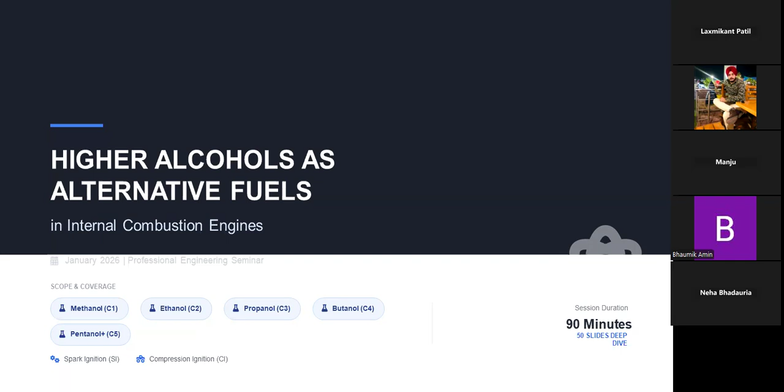There are some agenda and learning objectives, such as motivation, decarbonization, air quality, energy security. Other one is fuel property, fundamentals, and comparisons. SI and CI combustion mechanism and performance. Emission standards, infrastructure, and safety. Last is techno-economics, case studies, and future outlooks.

So why alcohol fuels now? Climate target, renewable fuel, mandates, accelerating globally. There is one graph also showing on screen. You can see that drop-in and flex fuel pathways allow near-term impact without full electrification. Another one is high octane and oxygen content enable significant engine efficiency gains also. Emerging e-fuels, power to alcohol, closes the carbon loop effectively.

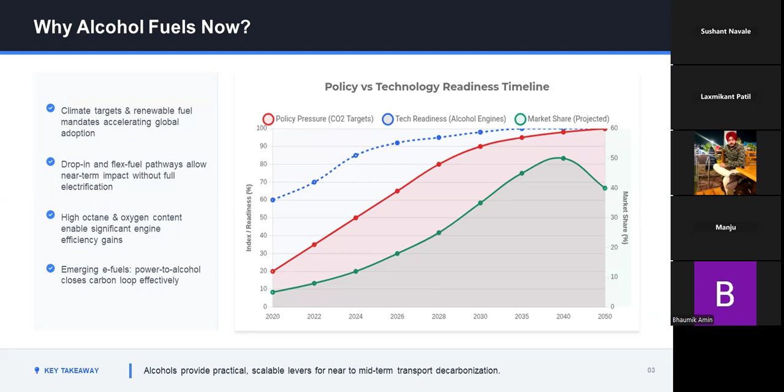There is another graph showing on screen of core fuel properties at a glance.

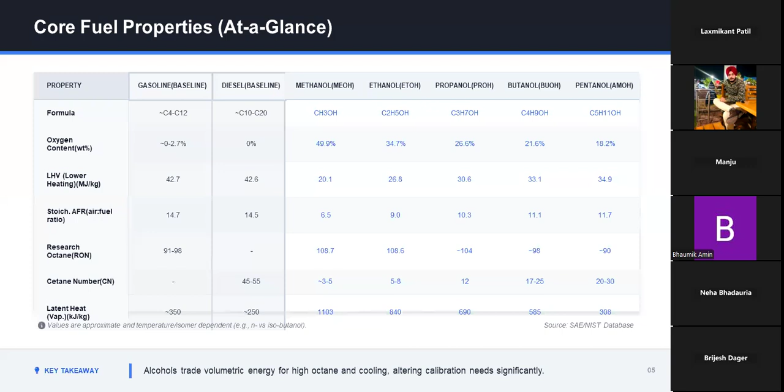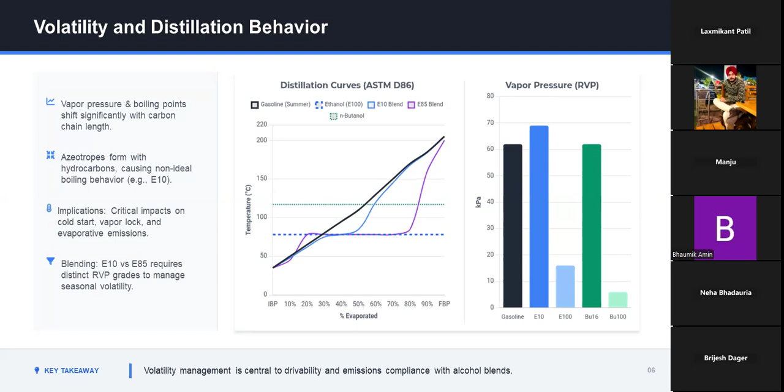What is volatility and distillation behavior? One graph is also showing on screen. You can see that vapor pressure and boiling points shift significantly with carbon chain length. Azeotropes form with hydrocarbons causing non-ideal boiling behavior, for example E10. Implications - critical impact on cold start, vapor lock, and evaporative emissions. Last is blending - E10 versus E85 requires distinct RVP grades to manage seasonal volatility.

Miscibility, hygroscopicity, and water tolerance. One picture is shown on your screen. One is lower alcohols, C1 to C2 - highly polar nature, strong affinity for water, resist mixing with non-polar hydrocarbons. Second is high hygroscopicity, rapidly absorbs moisture from ambient air during storage. Last is phase separation risk - separates into aqueous organic layers if water threshold exceeded.

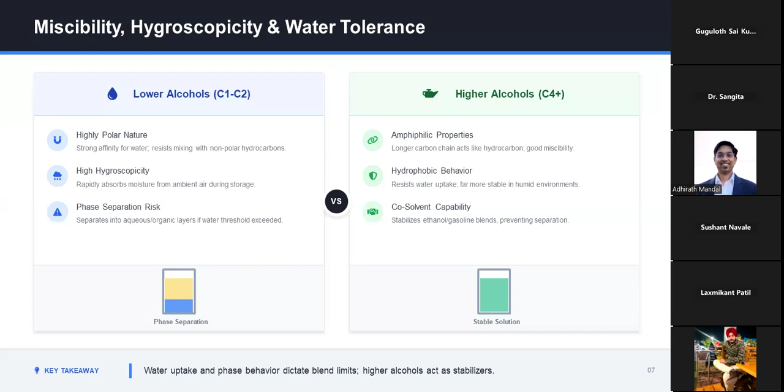Another picture is of higher alcohols, which is C4 and above. Amphiphilic properties - longer carbon chain acts like hydrocarbon, good miscibility. Hydrophobic behavior - resist water uptake, more stable in humid environments. Last is co-solvent capability - stabilizes ethanol-gasoline blends, preventing separation also.

Material compatibility and corrosion - there are 4 points of that. First one is elastomers and plastics - swelling and embrittlement risks. Metal - aluminium, zinc, and copper corrosion with low pH. Conductivity with galvanic effect in presence of water. Last is mitigation - compatible materials, inhibitors, and coatings.

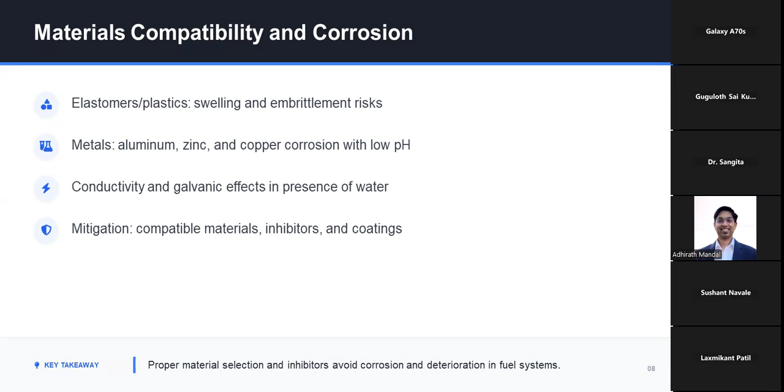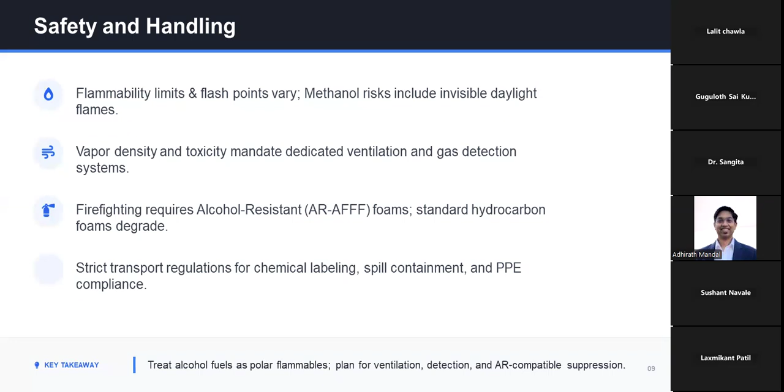What is safety and handling? There are also 4 points of that. First is flammability limits and flash point vary - methanol risks include invisible daylight flames. Second is vapor density and toxicity, mandate dedicated ventilation and gas detection system. Third one is firefighting requires alcohol resistant foam, formula AR-AFFF. Standard hydrocarbon foam degrades. Last is strict transport regulation for chemical labeling, spill containment, and PPE compliance.

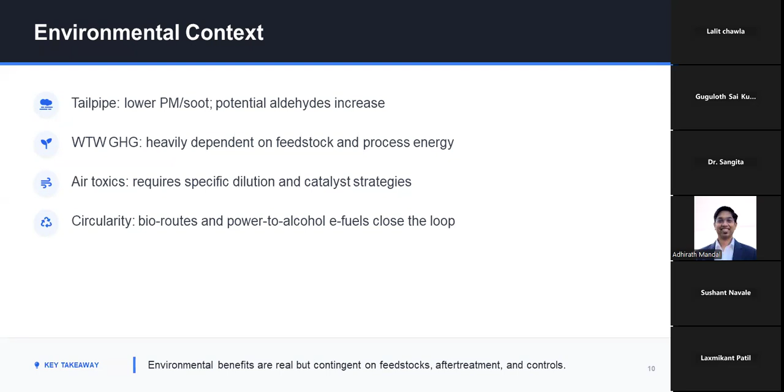Here is one diagram shown on your screen. You can see that this is of SI combustion fundamentals with alcohols. Let's discuss the diagram. High octane, RON greater than 100, suppresses knock, enabling higher compression ratios and optimal spark timing, formalized as MBT. Second is charge cooling via high latent heat, increases air density (formula VE) and drastically reduces end gas temperatures. Last is tolerance for lean operation, which improves thermal efficiency due to wider flammability limits.

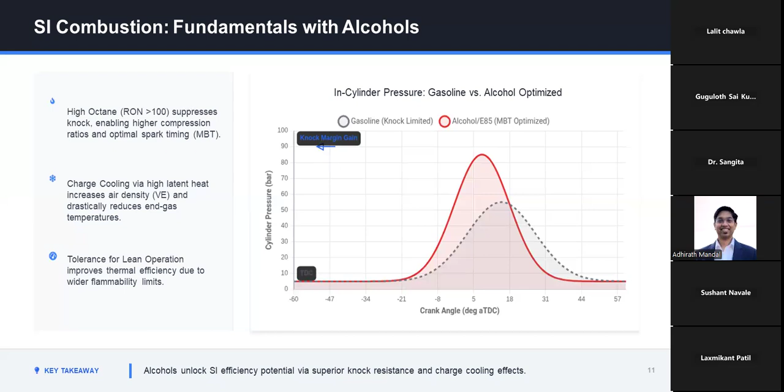Here is another diagram on your screens, of laminar flame speed versus equivalence ratio. Higher laminar flame speeds for methanol and ethanol exhibit significantly faster flame propagation than gasoline, especially in rich mixtures.

Second is shortened burn duration. Faster turbulent combustion allows MBT spark timing closer to TDC, improving thermal efficiency. Last is operational implications: benefits include higher indicated efficiency, but this creates a risk for cold start misfires due to vaporization issues.

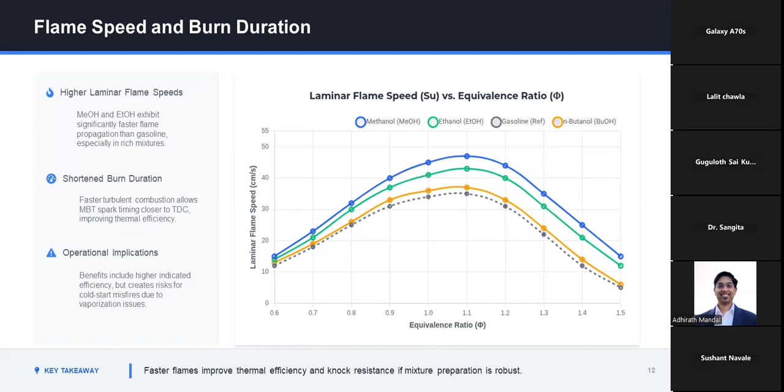What is SI emissions formation with alcohols? There are four points to that.

First is CO and HC, trends are highly sensitive to lambda and wall wetting effects due to high latent heat. Second is unregulated aldehydes, which have two more parts: formaldehyde and acetaldehyde, which may increase, requiring specific oxidation catalysts.

Third, NOx is generally low due to charge cooling reducing peak temperatures, though this is calibration dependent. Last is catalyst light-off challenges that arise from cooler exhaust.

Oxygen storage capacity, short form OSC, interacts with fuel oxygen.

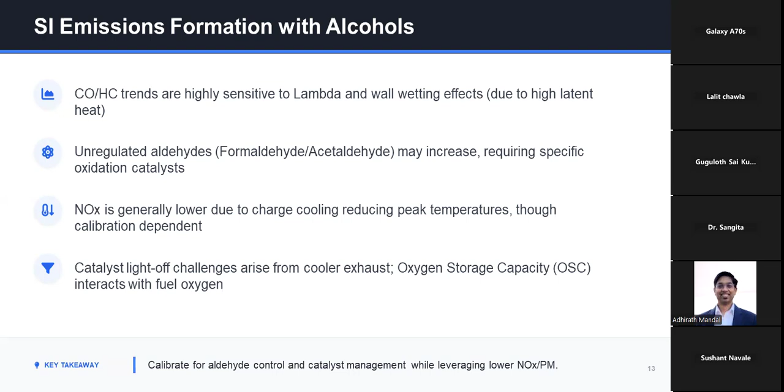One diagram of ambient temperature is shown on your screen. High latent heat significantly hinders cold vaporization; methanol's latent heat is bigger than ethanol's. Second point is mitigation.

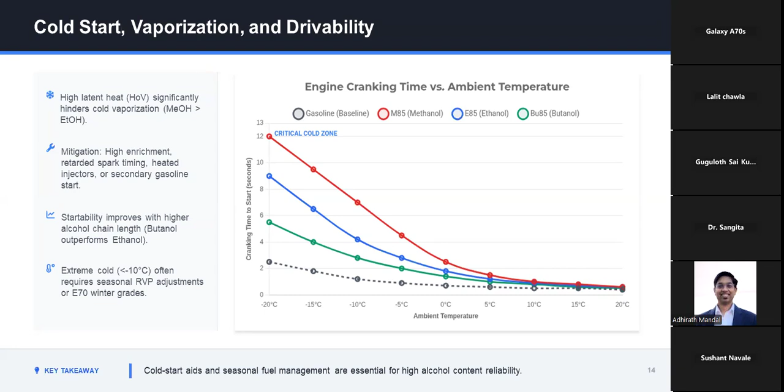Mitigation strategies include high enrichment, retarded spark timing, heated injectors, or secondary gasoline start. Startability improves with higher alcohol chain length, butanol outperforms ethanol. In extreme cold, below minus 10 degrees, this often requires seasonal RVP adjustments or E70 winter grades.

CI combustion's fundamentals and challenges. There is a diagram which represents low cetane number alcohols, 3 to 5, versus diesel at 45 to 55, which causes resistance to auto-ignition and cold start issues.

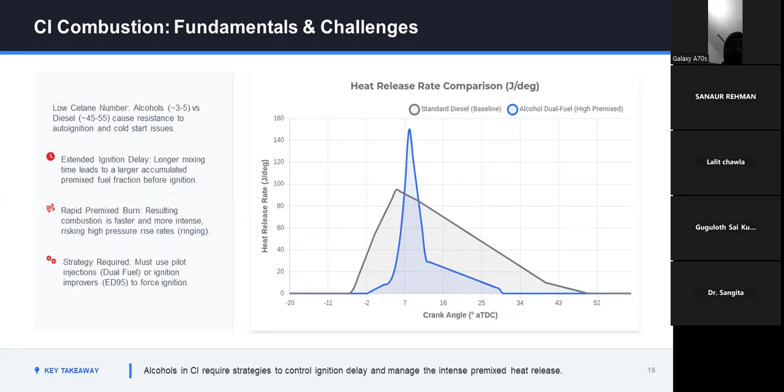Extended ignition delay and longer mixing time leads to a larger accumulated pre-mixed fuel fraction before ignition. Rapid pre-mixed burn results in combustion that is faster and more intense, risking high pressure rise rates, known as ringing. Last is strategy required: must use pilot injection, dual fuel, or ignition improver like ED95 to force ignition. You can also see a diagram of crank angle.

There is a diagram of the soot suppression mechanism, you can see that.

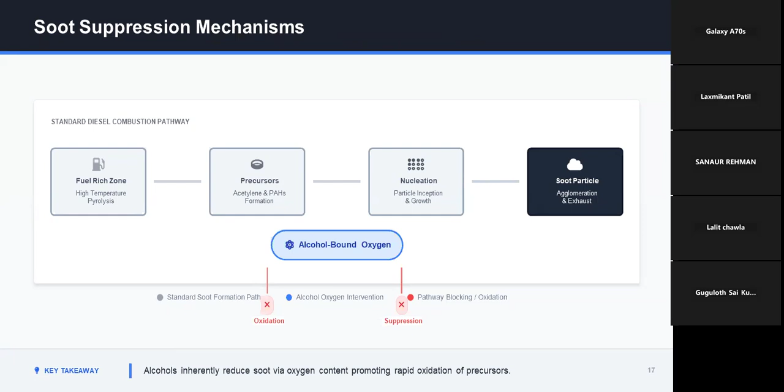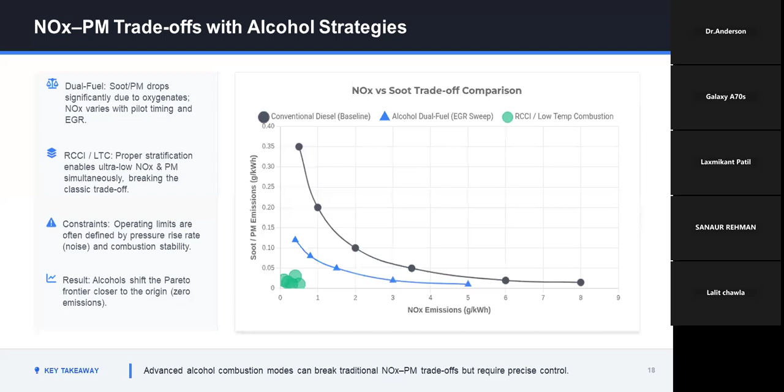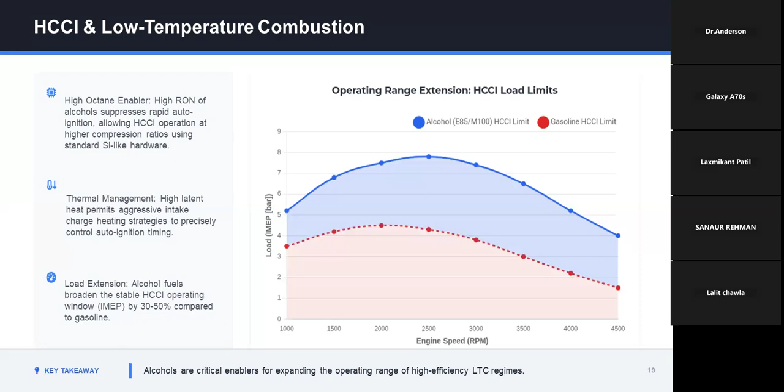Let's talk about measuring alcohol combustion. In-cylinder pressure, HRR, knock, and PRR metrics.

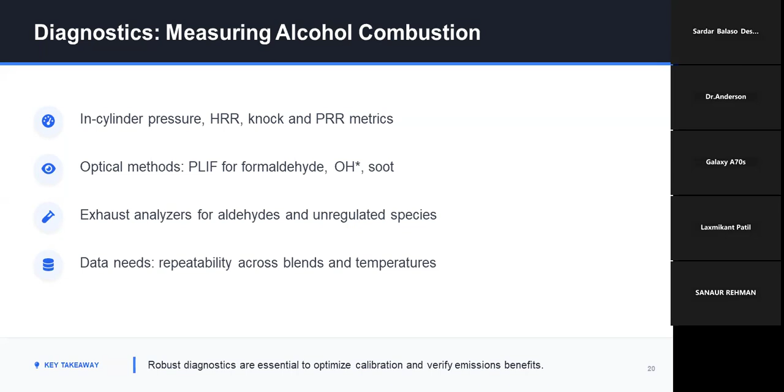Second is optical methods, which are PLIF for formaldehyde, OH soot, and exhaust analyzers for aldehydes and unregulated species. Last is data needs: repeatability across blends and temperatures.

What is SI hardware and calibration adaptation? There are four points to that. First one is flex fuel sensors and closed loop lambda control.

Second is larger injectors, pump for lower LHV fuels. Third one is compression ratio and boosting opportunities. Let's talk about the last point.

Knock control: ion sense and pressure based strategies.

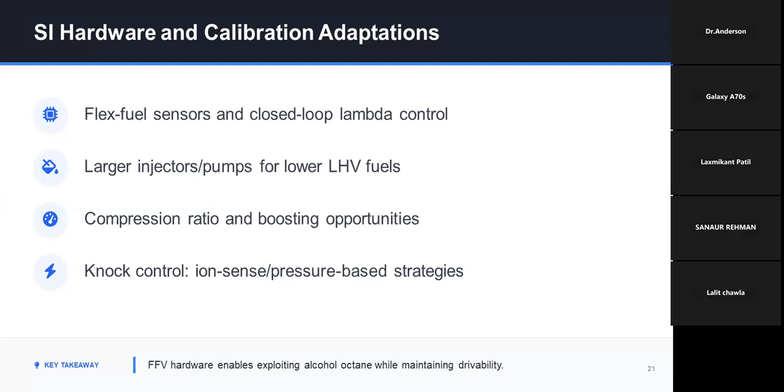Let's talk about CI hardware and system consideration. It also has four points.

First one is injector material and seals must be compatible with polar alcohols. For example, FKM and stainless steel.

Second one is pilot and multiple injection capabilities required for precise ignition and heat release control. Third point is intake port injection.

It enables cost-effective dual fuel retrofits for existing engines. Last one is turbocharging and EGR tuning, necessary to manage altered exhaust enthalpy and thermal profiles.

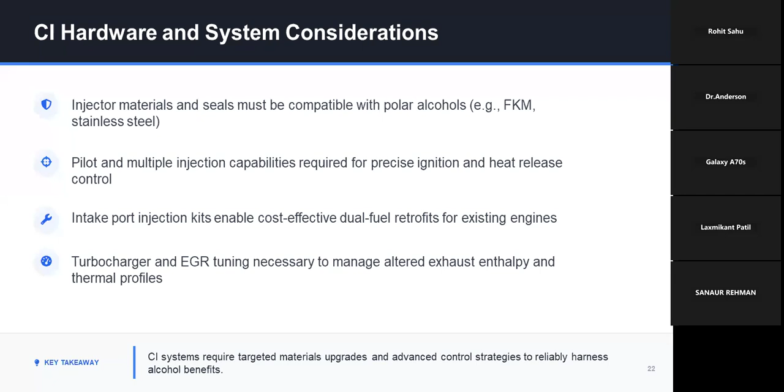Lubricity, wear, and oil management. Let's talk about that, it also has four points.

First one is alcohols reduce fuel lubricity, increasing wear risk of high pressure pumps and injectors. Oil dilution occurs from low volatility fuel fraction and cold start potential, thinning the lubricant.

Third point is combustion byproducts can accelerate total base number, short form TBN, depletion and corrosion. Last is mitigation, which prescribes use of lubricity additives, adjusted oil change intervals, and optimized warm-up strategy.

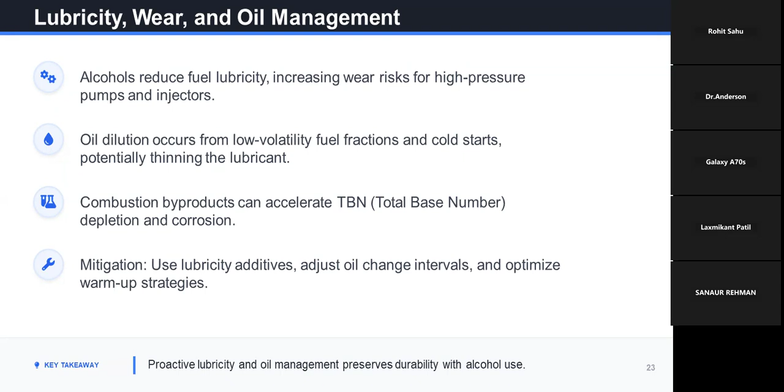After treatment interaction has a total of 5 points. Let's talk about the first one: TWC challenges - oxygenate rich exhaust and altered light-off behavior.

Second is CI oxidation, which we also call DOC, critical for aldehyde conversion efficiency.

Third one is particulate filters, DPF - lower soot load reduces regeneration frequency.

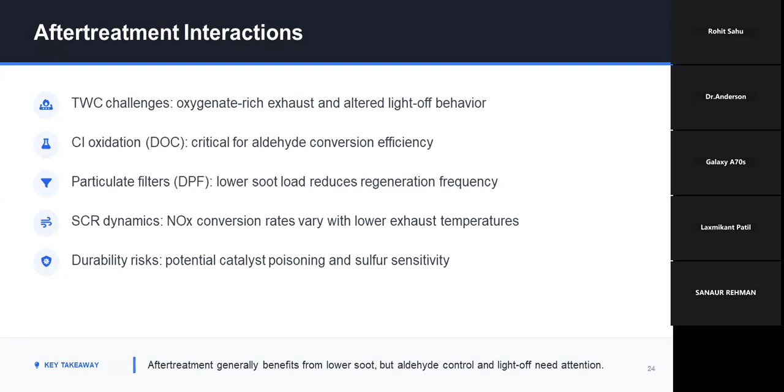Fourth is SCR dynamics - NOx conversion rates vary with lower exhaust temperatures. And let's talk about our last point, durability risks, which is potential catalyst poisoning and sulfur sensitivity.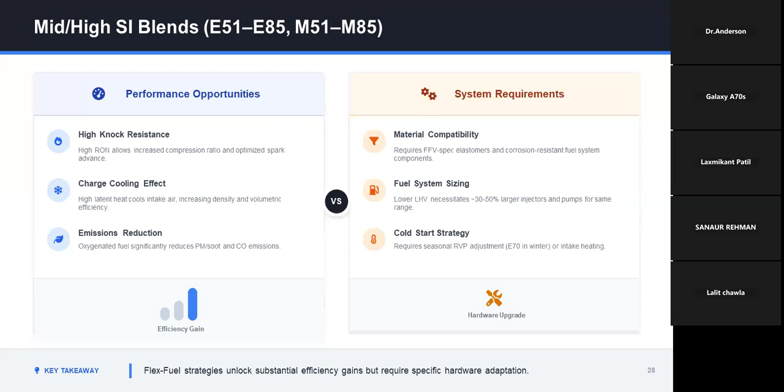It is hardware upgrade, and the first one is efficiency gain. It is the difference between the two figures - performance opportunities and system requirements.

Butanol and higher alcohol blends. Higher energy density and lower vapor pressure than ethanol offer improved fuel economy and handling, better miscibility with hydrocarbons, and

less hygroscopic, reducing phase separation risk. Third is significant octane uplift with lower impact on evaporative emissions compared to lower alcohols.

Standardization is rapidly evolving - ASTM D7862, with ongoing pilot deployments in fleets. You can also see the key takeaway mentioned at the bottom of the screen.

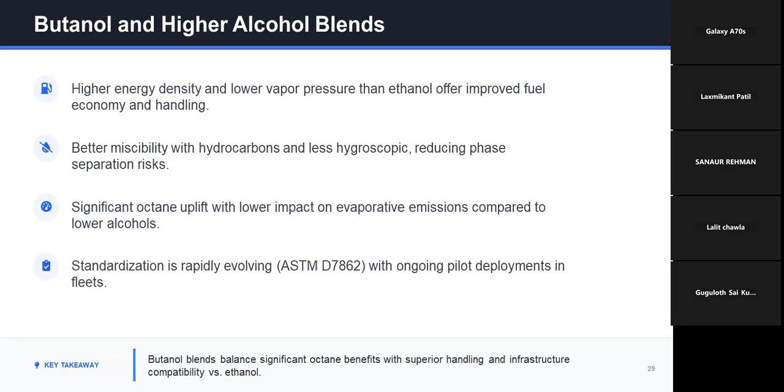Let's talk about alcohol diesel blending strategy. It is described in 4 points. Direct blending is limited by phase separation.

Co-solvents, example biodiesel, higher alcohols, are required. Microemulsions using surfactants enable stable blends despite water content.

Cetane improvers, example nitrates, essential to restore auto-ignition quality. Critical challenges - water tolerance, stability, and low temperature operability. You can see the key takeaway.

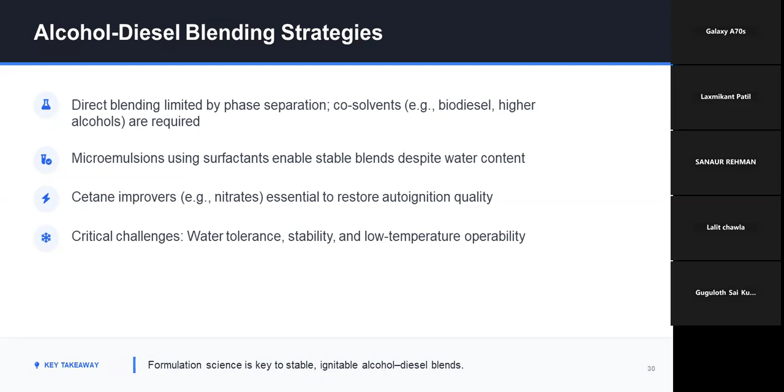Let's talk about dual fuel CI and RCCI concepts. It is in 4 steps. First is port injector, intake stroke, port injection of low reactivity fuel.

Then compression, formation of homogeneous background charge. Then we have ignition trigger, direct injection of high reactivity fuel. Last one is combustion, staged heat release via reactivity stratification.

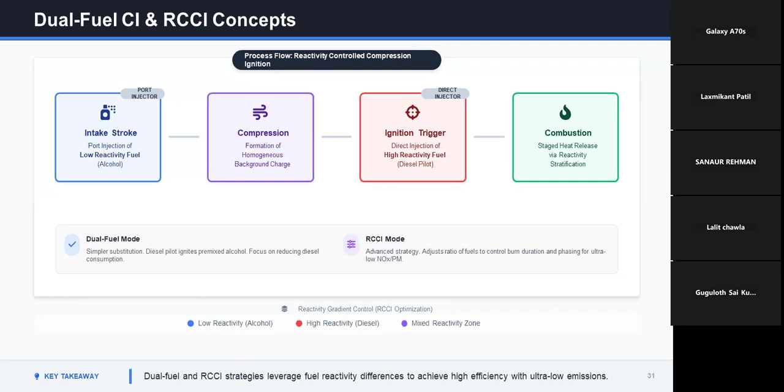Emissions, which is overview and matrix. Regulated NOx, CO, HC, PM mass, and PN particles. Unregulated aldehydes, ketones, PAHs, ammonia, and N2O.

Let's talk about that. First, we have NOx reduction, which represents high latent heat cooling the intake charge, reducing peak combustion temperatures and thermal NOx formation.

Second is CO decrease, which represents fuel-bound oxygen improving local oxidation efficiency, significantly lowering CO emissions across most loads. HC complexity - while oxygenate aids combustion, poor vaporization and wall wetting in cold conditions can spike engine-out HC.

Last one is CI context, which describes dual fuel strategies often breaking the NOx-soot trade-off but may require DOCs to manage light load HC slip. You can see the bar graph.

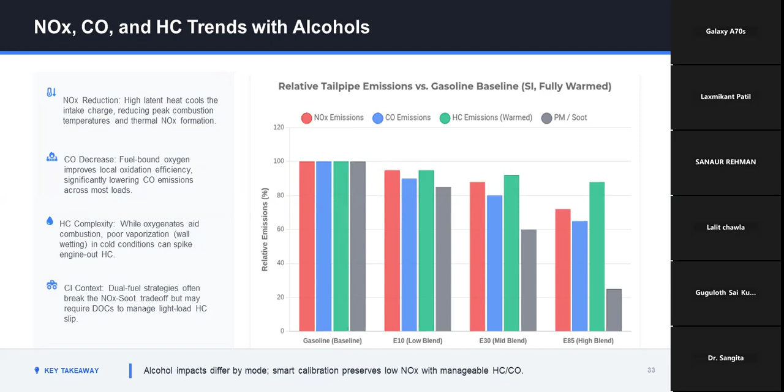Aldehydes and unregulated species described in 4 points. Let's talk about the first one - formaldehyde, acetaldehyde formation pathways driven by partial oxidation.

Second is mitigation - relies on effective oxidation catalysts and precise calibration. Third one is measurement challenges, including sampling line losses and chemical artifacts.

Rising health concerns are driving new regulatory monitoring trends. See the key takeaway at the bottom of your screen.

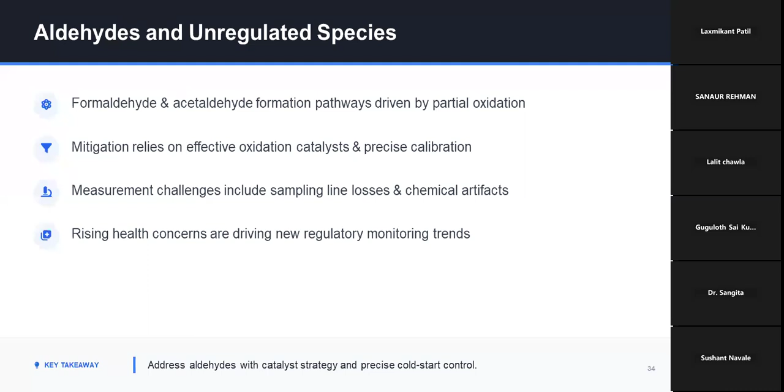See one diagram on your screens of particle number versus engine load, which is represented in line graph. Let's talk about that.

Significant PM soot mass reduction in SI and CI engines due to fuel-bound oxygen inhibiting precursor formation. Second is nucleation mode: ultrafine particles may increase under cold or lean conditions. Reduced soot loading extends DPF or GPF regeneration intervals and durability.

Last one is PN limit. Euro 6d or 7 requires optimized injection strategies, even with clean alcohol fuel. You can see the key takeaway also. Let's move to another point.

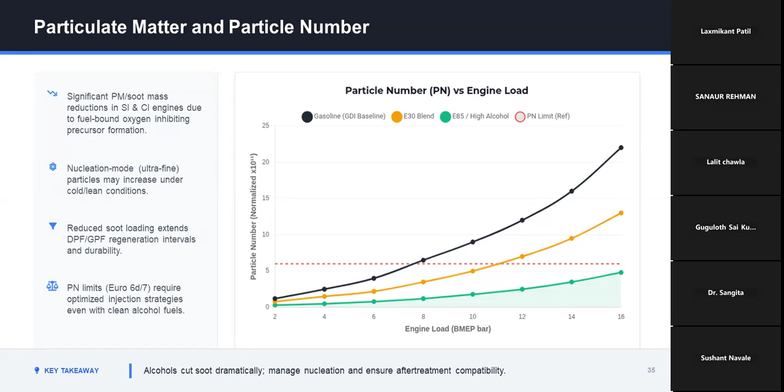Tailpipe versus well-to-wheel emission. There are total 4 steps. First is feedstock, which includes farming, land use, and harvesting. Then production, which includes refining, synthesis, fermentation. Then distribution: transport, storage, and dispensing. Last, we have vehicle use: combustion, tailpipe exhaust. You can see the diagram mentioned on your screens.

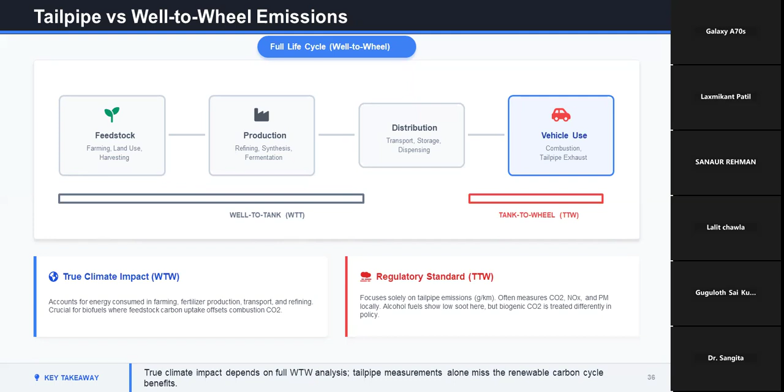Let's move to another slide. Here we have the topic of compatibility in storage and distribution. First, we have tanks and liners. It describes specific compatibility required for steel, aluminium, and fiberglass to prevent degradation.

Then seals and gaskets: FKM, Viton, and PTFE are preferred. Avoid NBR nitrile for high alcohol blends. Pump and dispenser upgrades: retrofitting hardware and updating labeling is required for consumer safety. You can also see the key takeaway, which is select alcohol compatible materials across the supply chain to prevent failures.

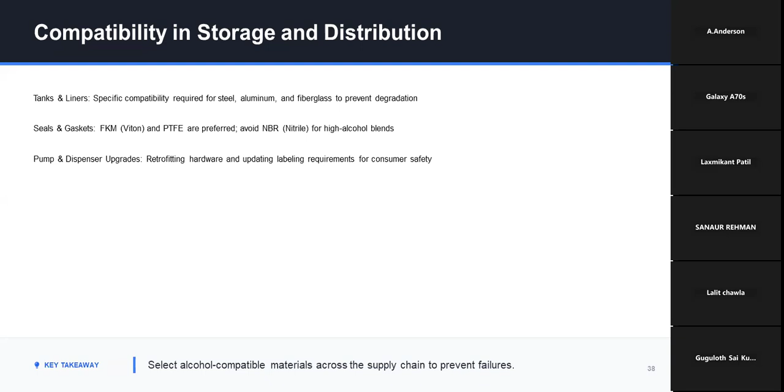Then we have volatility, vapor lock, and permeation. RVP tuning and seasonal volatility grades are critical to balance cold start against vapor lock issues. Second is permeation through polymers, which increases with alcohol blends, risking canister overloading and evaporative emission.

Then we have engine bay heat soak, which requires robust hot restart strategy to prevent fuel vaporization in the rail. Let's talk about the key takeaway, which is control volatility and permeation to maintain drivability and emissions compliance.

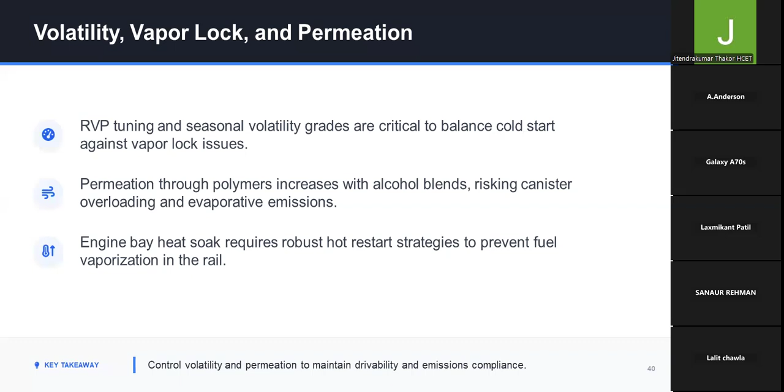Safety systems and transport. First, we have gas detection and ventilation in storage garages, which is described as crucial for mitigating vapor accumulation given specific density and flammability limits. Then fire suppression: AR-AFFF foams and compatibility, where standard foams degrade rapidly. Alcohol resistant, short form AR, foams are mandatory.

DOT or ADR transport classes, placarding, and training. Specific protocols for toxicity, methanol versus general flammable liquid handling. Let's read about its key takeaway: safety planning must reflect polar solvent behavior and response protocol.

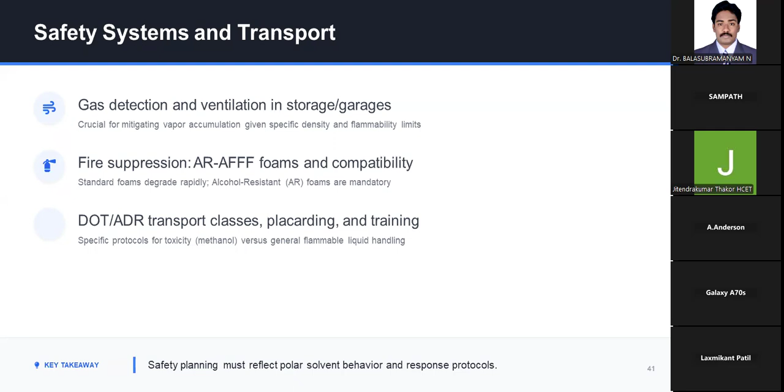Let's talk about fuel specification and test methods. First, we have ASTM D4806 base component, which prescribes standard specification for denatured fuel ethanol for blending with gasolines for use as automotive spark ignition engine fuel.

Then we have ASTM D5798 finished fuel, which is the standard specification for ethanol fuel blends, varying from ED75 to ED85 for automotive spark ignition engine, which is flex fuel.

Then EN15376 base component: automotive fuels, ethanol as blending component for petrol, requirement and test method, which is the European standard. Last we have ISO 22854 test method: liquid petroleum products, determination of hydrocarbon types and oxygenate in automotive motor gasoline.

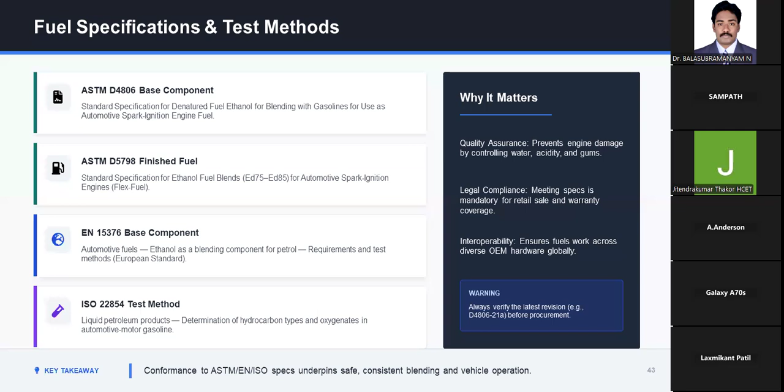Methanol and butanol standards landscape. First, we have ASTM D5797 fuel methanol M85, standard specification for fuel methanol, varying from M70 to M85 for automotive spark ignition engine, which is similar to E85 but for MeOH only.

Then we have ASTM D7862 butanol blend, which describes standard specification for butanol for blending with gasoline for use as automotive spark ignition engine fuel, which varies up to 12.5% volume.

Then we have regional and emerging pilots: evolving specs for higher alcohols, which is C5+, and regional methanol standards. For example, China M100, India BIS M15/M85.

What is the market status of that? Methanol maturity: high blend specs M85 or M100 are established in China. US D5797 exists, but market uptake is lower than butanol drop-in. D7862 allows butanol use in standard gasoline infrastructure without FFV hardware. In many cases, spec compliance doesn't guarantee material compatibility in legacy vehicles.